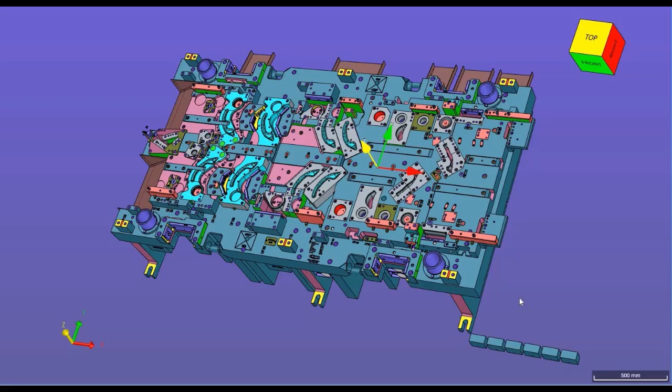Dear connections, welcome to the 6th part of this ongoing tutorial on progressive stamping die. Here, we will discuss each stamping die part, one by one. We will explain its working, its material, its heat treatment.

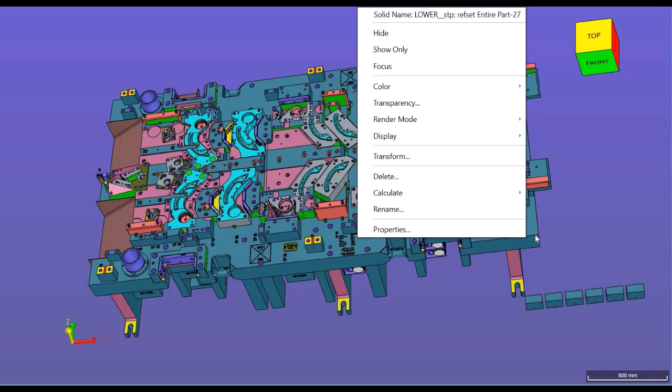The very first part which we see is the bottom die plate. Some people call it lower plate, some call it lower die shoe. It is made of HRS, also known as mild steel. Some people say boilerplate. Its thickness ranges from 3 inch to 6 inch. It depends upon die size and material specification of the part.

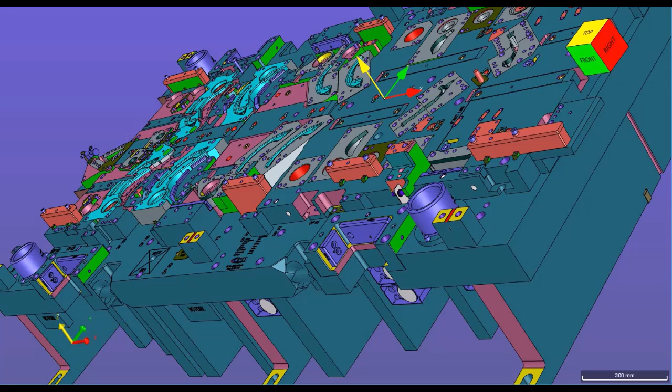For example, a dual phase material part will need more tonnage, hence a more robust die, hence a thicker die plate. Also the customer die standard is important to decide the lower die shoe plate thickness.

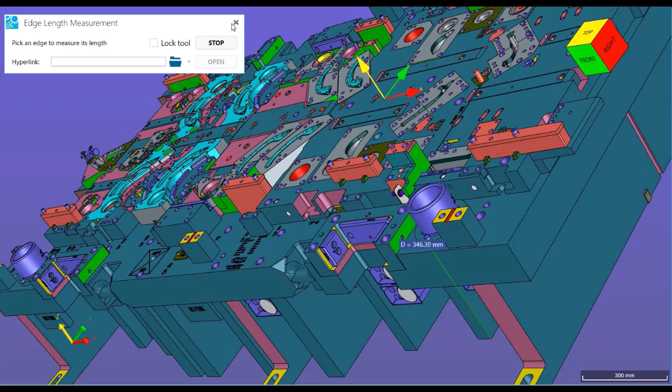To meet stamping press shut height and feed height requirements, we need to add parallels to the lower die shoe plate. These parallels will be 2 inch in thickness for general purpose, and 3 inch or 4 inch thick for clamping purpose. The parallel will be across die width, and will be bolted to the lower die shoe plate.

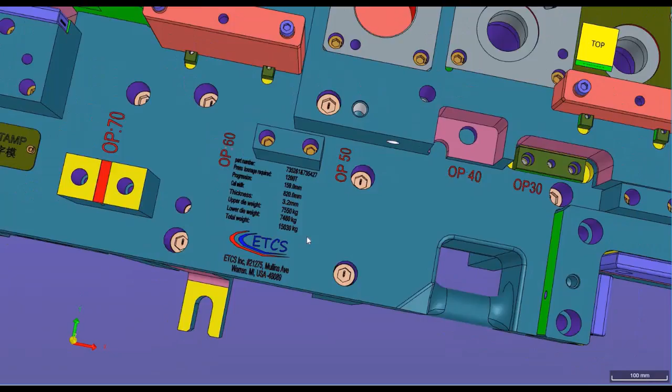We use M20 or 1 inch socket head cap screws, simply known as SHCS, to screw the parallel to the plate. We usually keep parallels after every 5 inch gap. We must provide parallels below the forming stations, or below the trim steel to support against the working force. We also provide parallels below the die safety area and stopper block area.

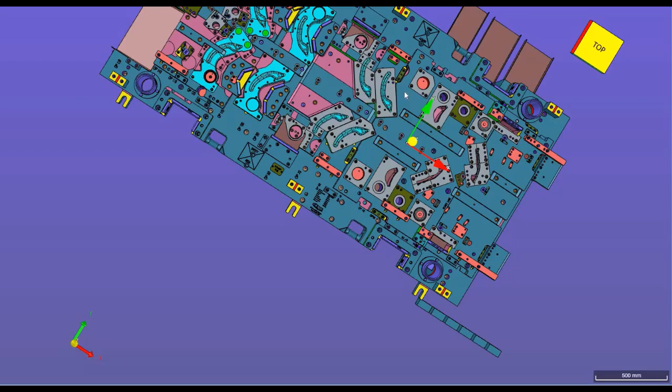In case the parallels have clamping feet, we provide 2 dowels as well to locate the parallel precisely. Usually we have 4 screws for a general parallel, and 6 screws for a clamping parallel. In case the parallel has any relief machining for scrap fallout or any standard component placement, we provide foolproofing also. The screw counterbore is in the lower die shoe plate, and the thread will be in the parallel.

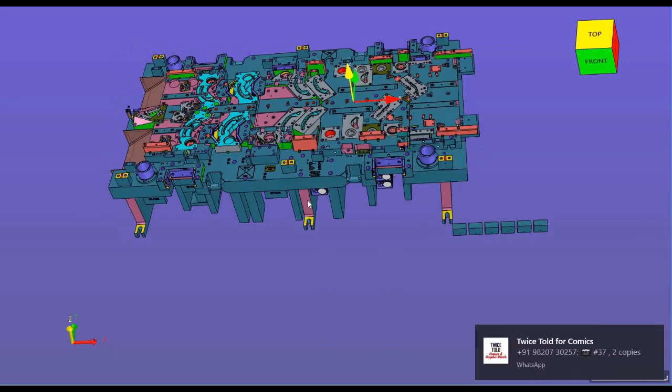The lower die shoe plate will have lift holes and/or lifting handles as per die standard. Usually we provide M40 for big dies as lift screw hole.